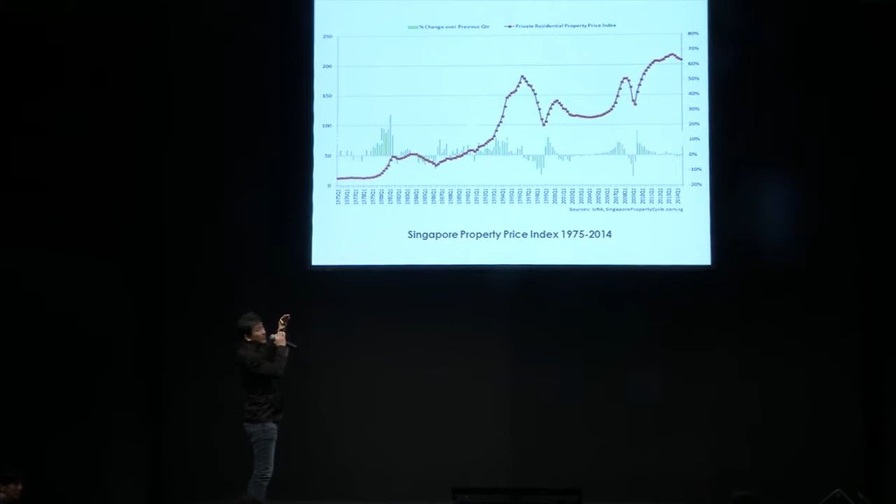In the last 20 years, property prices, due to scarcity and the growing population, have gone up fourfold. But ironically, the labor cost remains pretty much constant. So you've got low construction costs and very high land prices, which gave rise to this phenomenon called collective sale.

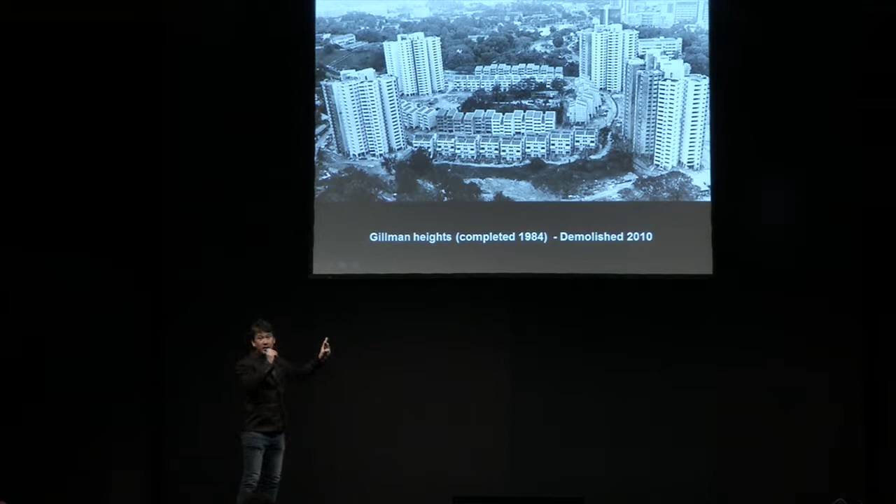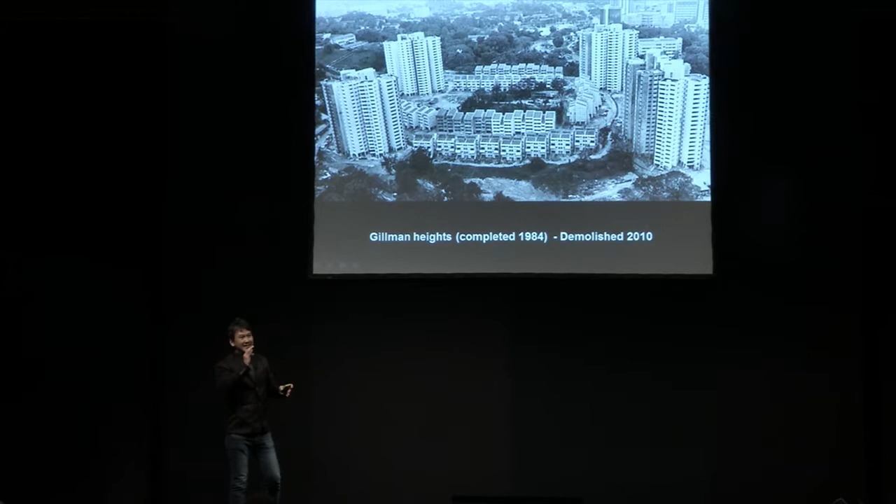This is a huge development in Gillman Heights that was completed in 1984. In less than 26 years, it was demolished, because the law allows the majority of owners to vote to sell the development wholesale. Because of land intensification, this was demolished to give rise to a new one.

So what do you have here? Literally a mindset in which we start from a clean slate because it is more optimal, and a culture of waste. One more thing about Singapore is that it's a tropical climate.

The average temperature is about 31 degrees, so there's a high reliance on air conditioning, so much so that we rely on it. What happens in air-conditioned environments is that you literally transfer the heat from inside the building to outside the building.

So when we started the practice, we thought there must be an alternative way of doing things. In 2006, this is the first preceding project.

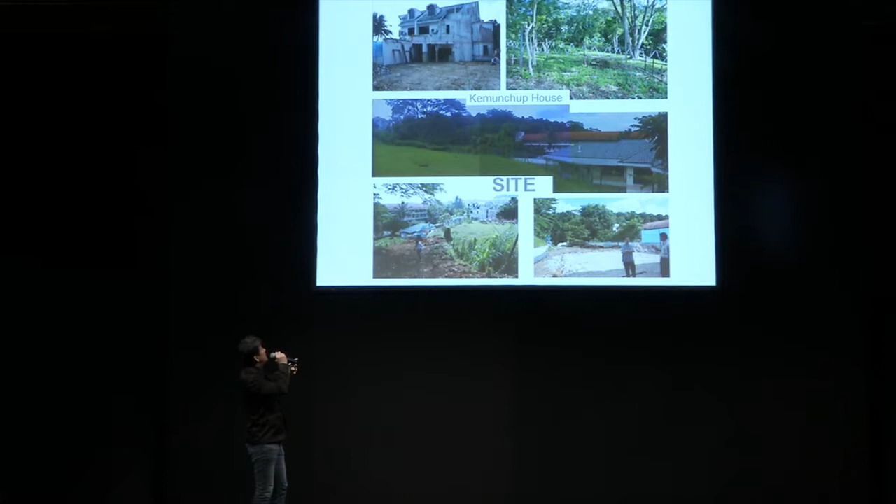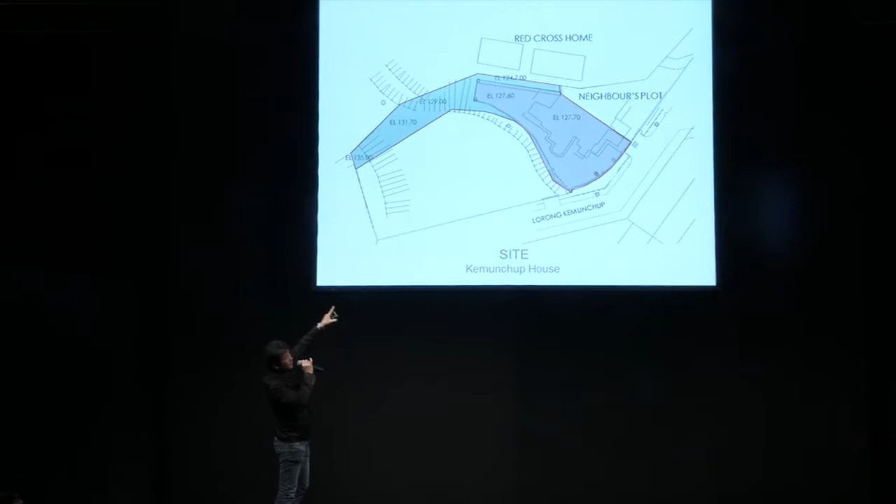The whole length of this is about 80 meters. The narrowest part of the site is about 5 meters — overwhelming constraints. The elevation from the highest to the lowest point is about 12 meters. And you have the existing house sitting down there.

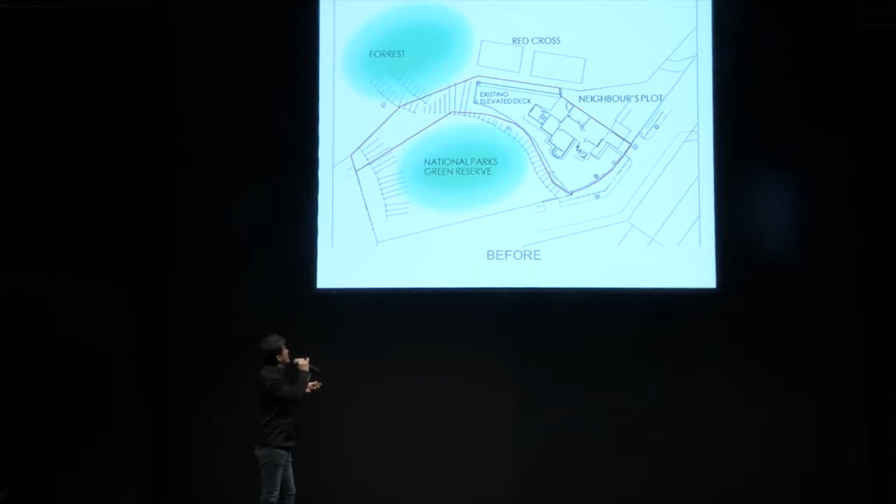What he wanted to do was tear it down and have more rooms to accommodate his parents. It's common practice in Singapore—you live with your parents, or invite them to stay with you—and he has 5 kids. Sandwiched in between, you have forests and a National Parks green reserve.

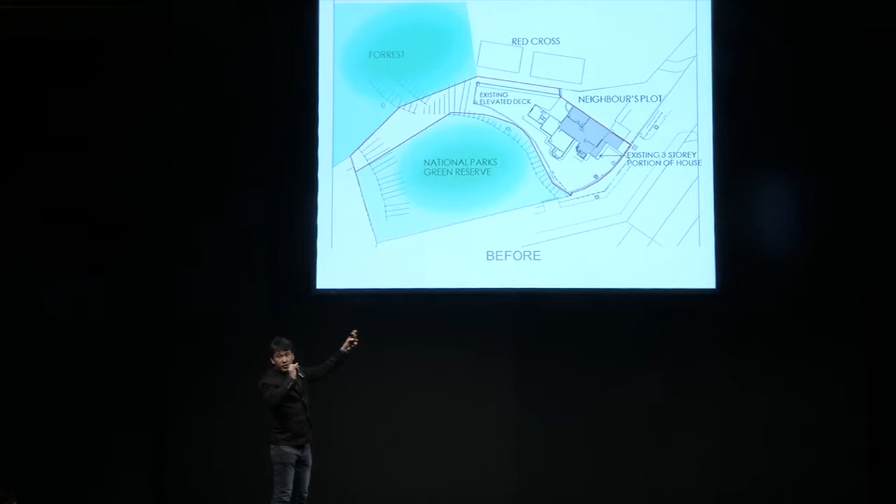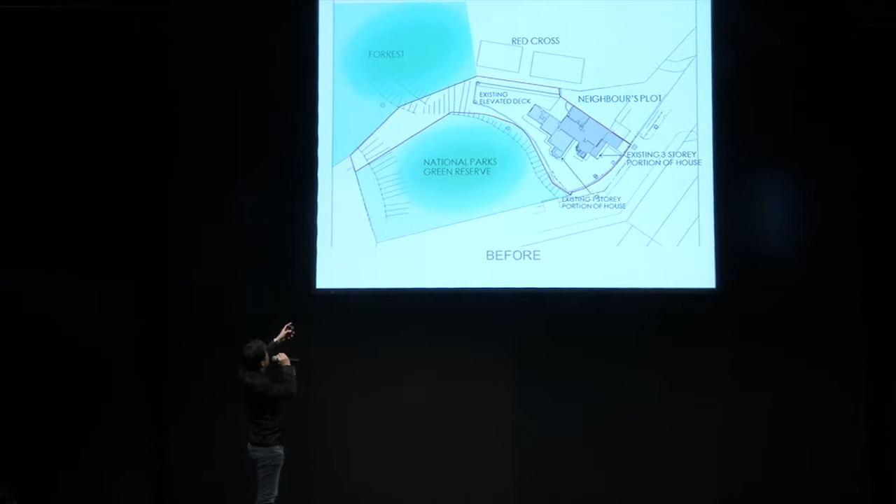That's the 3-story portion of the house and the 1-story portion of the house. When we analyzed the site, we thought, with that much land, the most valuable part is actually at the narrowest end. So why do you need to demolish?

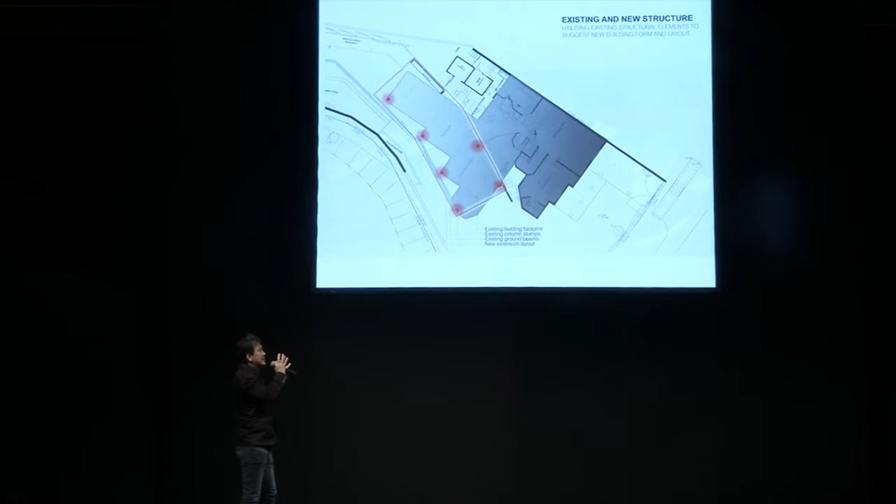In the existing house, you have the living facilities, kitchen and dining, and upstairs are all the bedrooms. The whole ground floor is a very opaque kind of construction, which didn't relate to the site at all. So what we did was plot out all the existing structure and foundation at the red points.

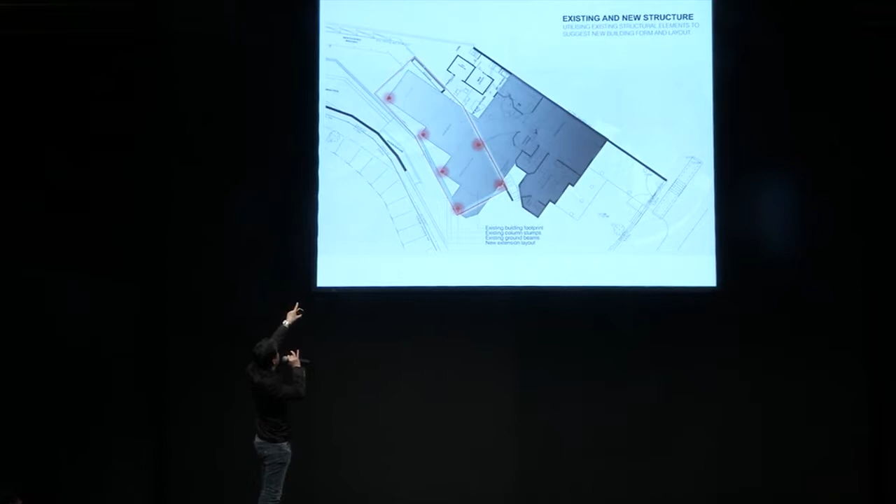We used that and reshaped the whole 1-story annex, relating it to the site, opening up views to the forest and the green.

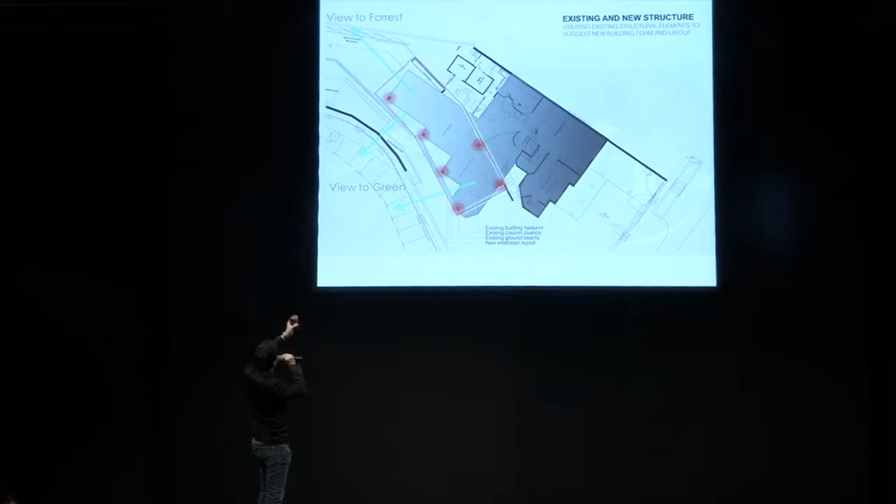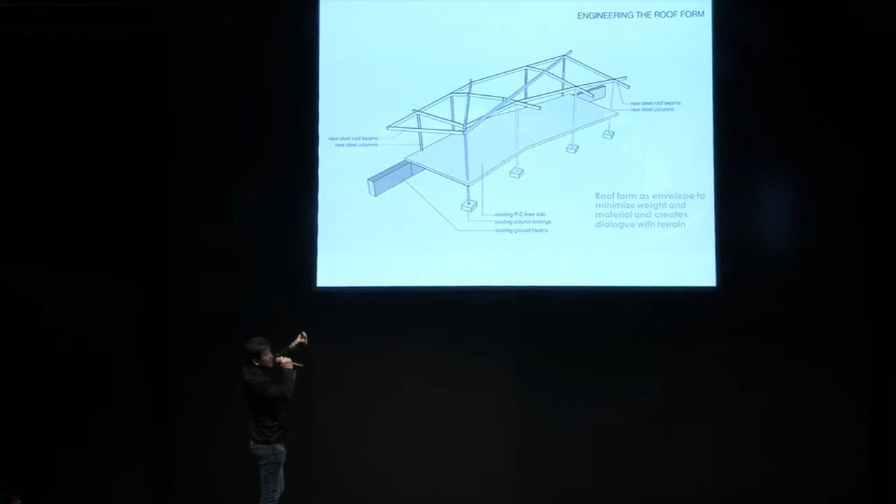We rested all the new structures—very, very light steel construction—on the existing foundation, so we didn't have to build new foundations. And because they don't align, you create a kind of very organic roof structure.

What you have is literally the existing house, and we created a living-dining pavilion, almost like the primitive shed concept—very light. We used roof shingles to cover the top, so it's light, with very low thermal capacitance.

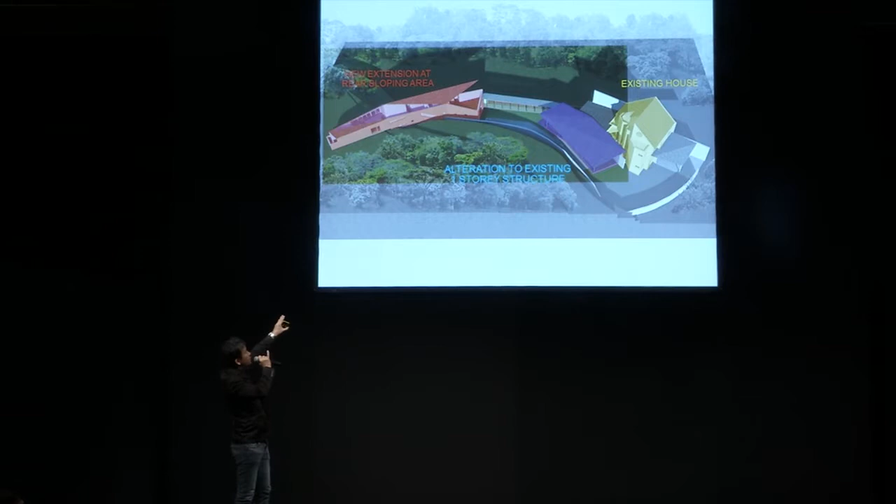We proposed a new house built at the back, at the narrowest point, where his 5 kids and themselves would live. The parents would live in the existing house, and they'd share all the facilities in between.

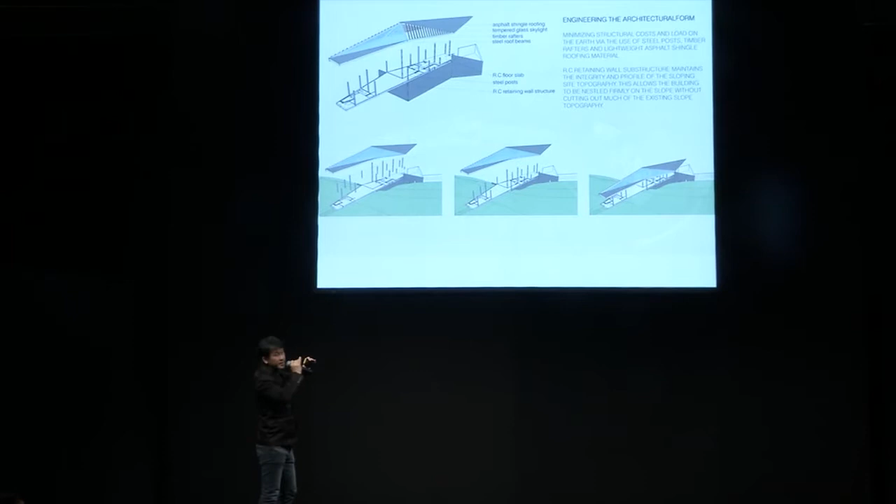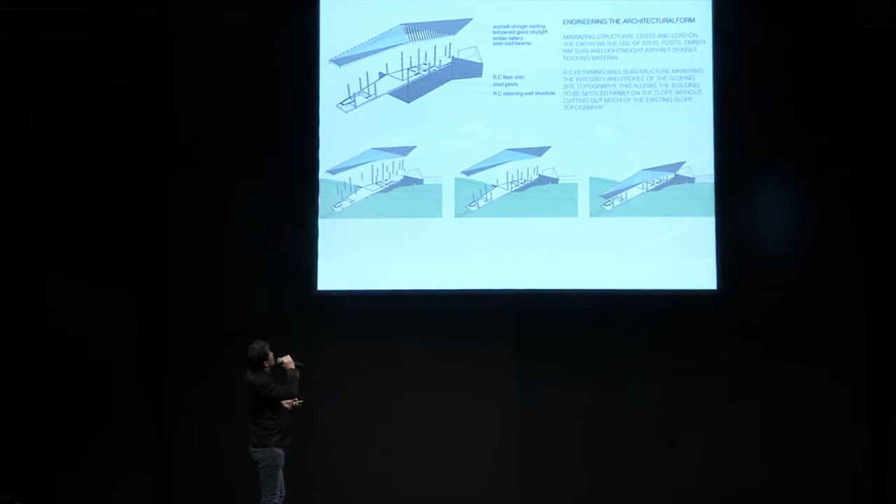At the back of the house, since it was elevated with a height difference of about 6 meters, we had to build a concrete raft and house an extremely light roof structure that hovers over it. It was a very, very lean engineering solution.

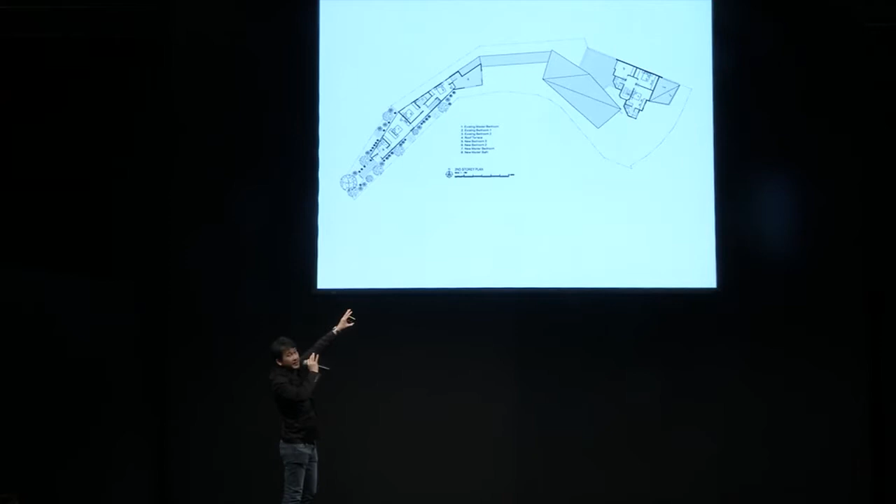We managed to expand the area of the house with 5 bedrooms at the back and another 3 bedrooms in front, giving 2 additional guest rooms. In the middle, you have the living pavilion.

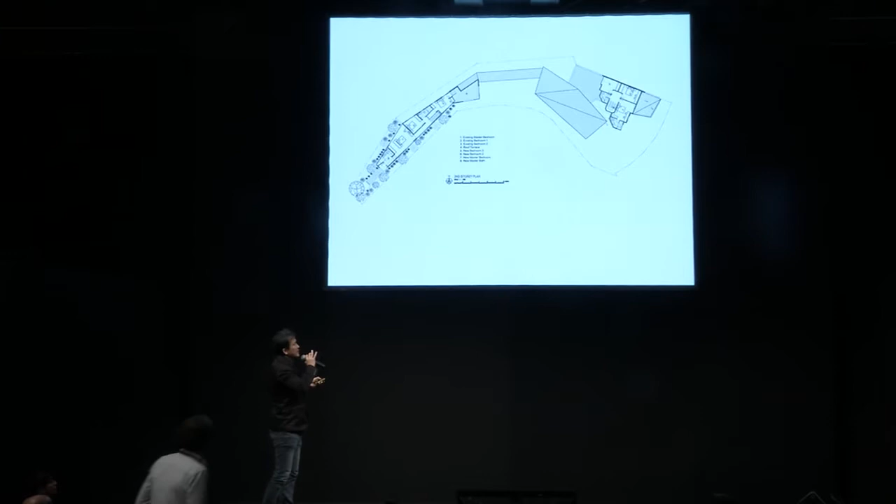So with a very, very low budget, we came out with a viable and, I think, quite poetic response, where the roof begins to undulate and nestle into the forest.

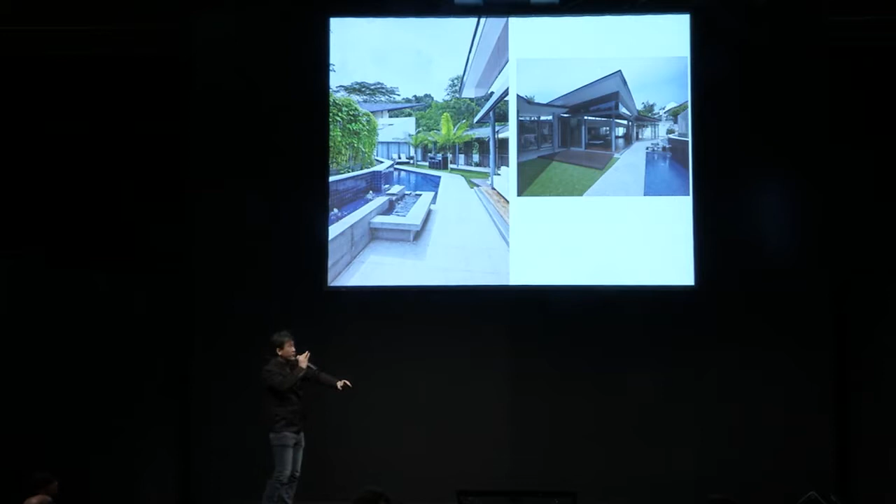And the lightness allows the air to actually flow through. We created a pool in the middle that was lining the perimeter of the existing structure and foundation. Pools in tropical climates are always very welcome because it acts as a heat sink, and through evaporative cooling it helps to bring down the temperature on the ground level.

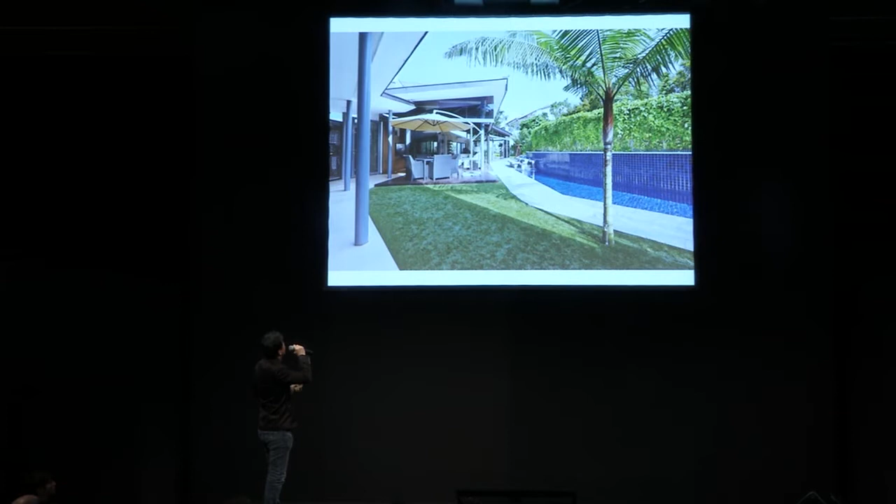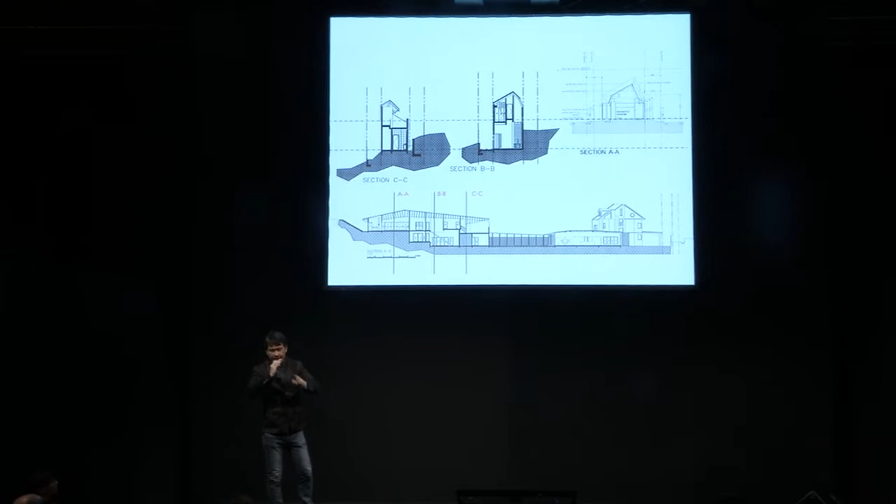And the lightness of the furniture begins to define the space. And how we made use of the pitch to minimize the material surface but optimize the space. So that's one of the bedrooms situated at the back.

Now the second house, which is the moonbeam house. This was the existing. The client came to us and said they want to tear down and rebuild again. But upon careful analysis, they actually had a substantial amount of land at the back.

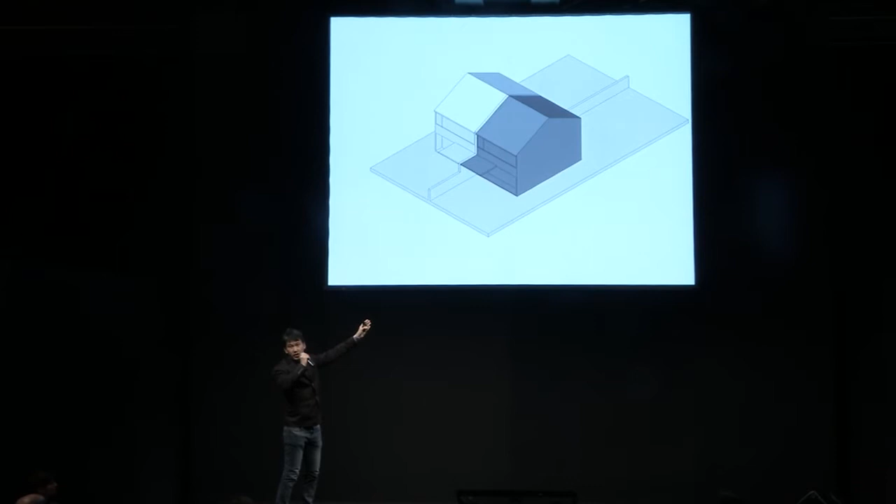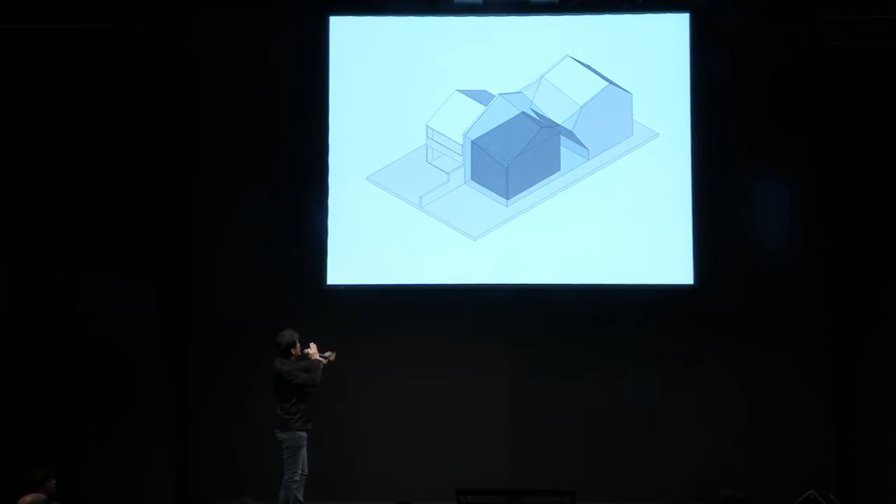So what we did was to create an outer skin so that the wife of the client, who was a fabric supplier, could have a studio, a large studio for her to work. This outer kind of structural skin, I call it, creates an armature that supports the additional attic roof. And the extension happens at the back.

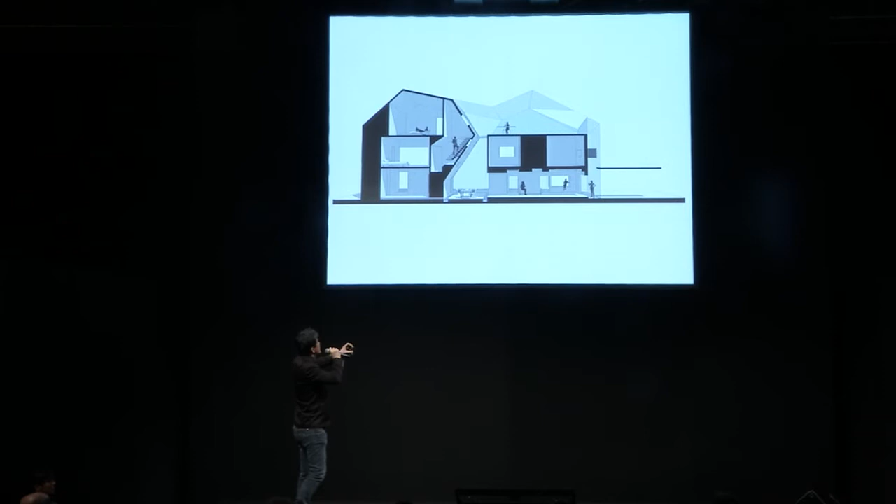So we preserved the existing house, created additional spaces, and the whole skin is actually a kind of metal mesh that's very, very conductive in a sense. It's highly porous, so the air actually flows right through the house.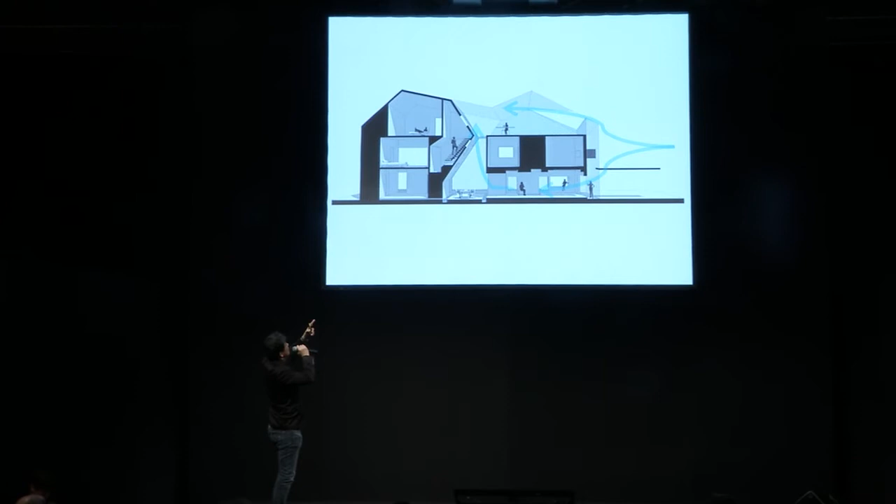That's the whole idea. We created a kind of central water court with a platform, so in the same way it helps to cool the house. And the studio happens in the attic. So that's what it looks like.

So the whole idea of creating that interstitial space is where the air flows through to help filter the heat and light, as well as cool the interior of the house. And that's the atrium - the space in between the new and the old, where you have surrounding water with this platform, allowing the air to flow up.

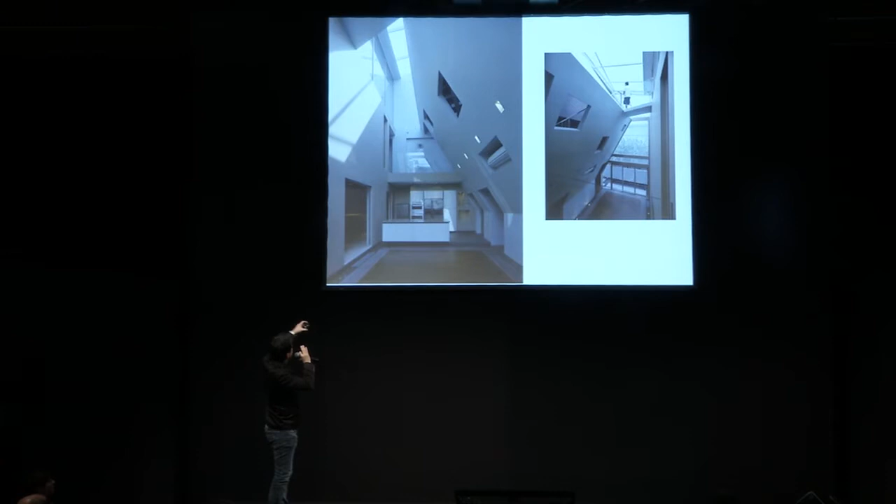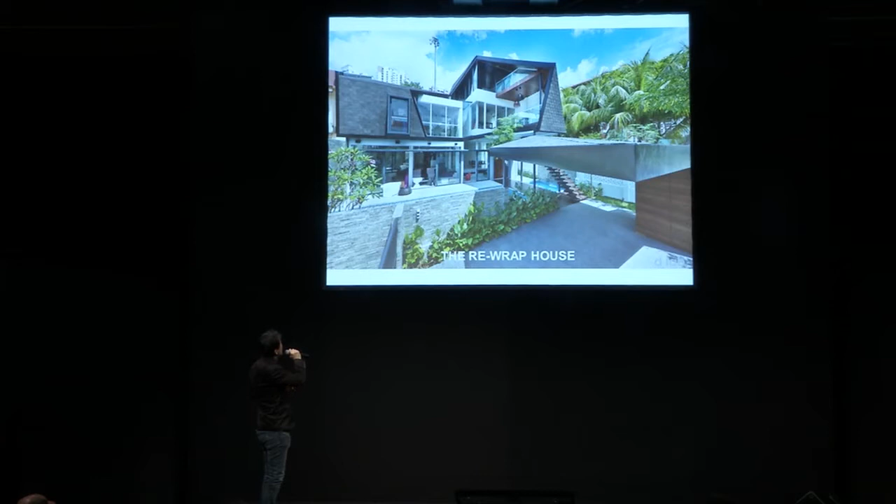So with these two ideas, this came about - the Re-Wrap House, in a similar situation. This is located at a cul-de-sac, and it's situated in a very dense, very urban environment where you have these tall housing developments in the background.

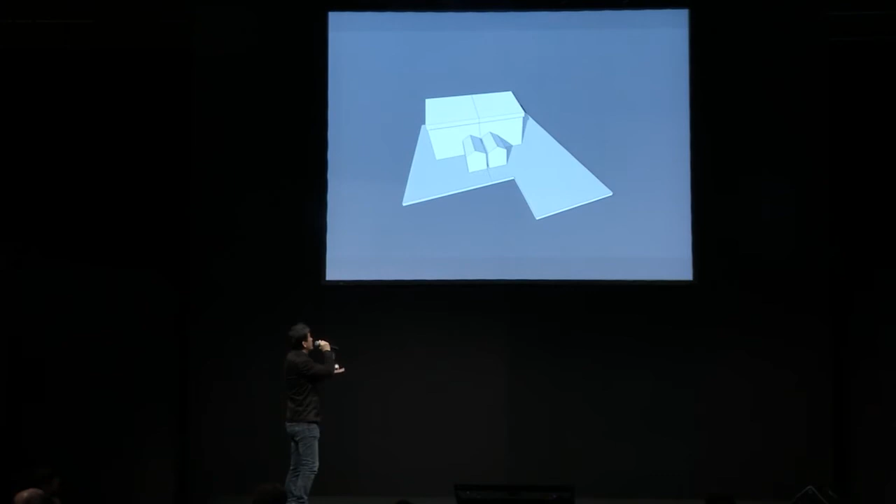And what we thought - in the same way that instead of tearing down and rebuilding, or building on top where it loads on the existing foundation - we wanted to create a very light structure beside it.

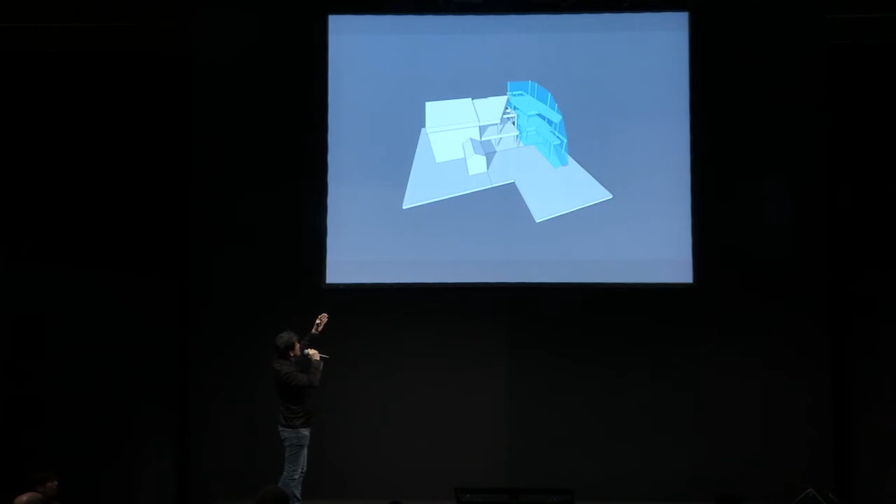And the program was to house an expanding family. She had one kid and was expecting two more, and the parents wanted to live with them. So they needed more space. Again, we started with a very light structure, steel construction with concrete slabs.

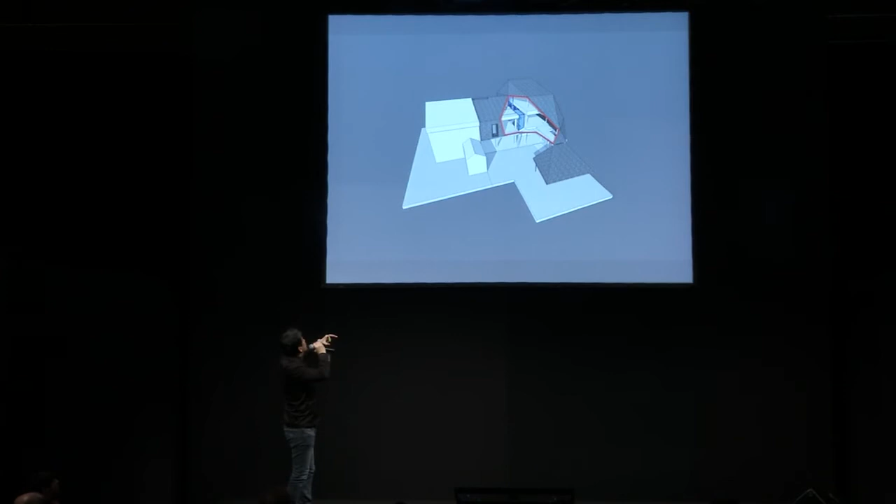And the idea was to wrap it with this very light material and create these interstitial spaces on the ground and at the attic, so that the air can flow through. We put the pool in the center, so it cools the whole ground floor, and that's the result.

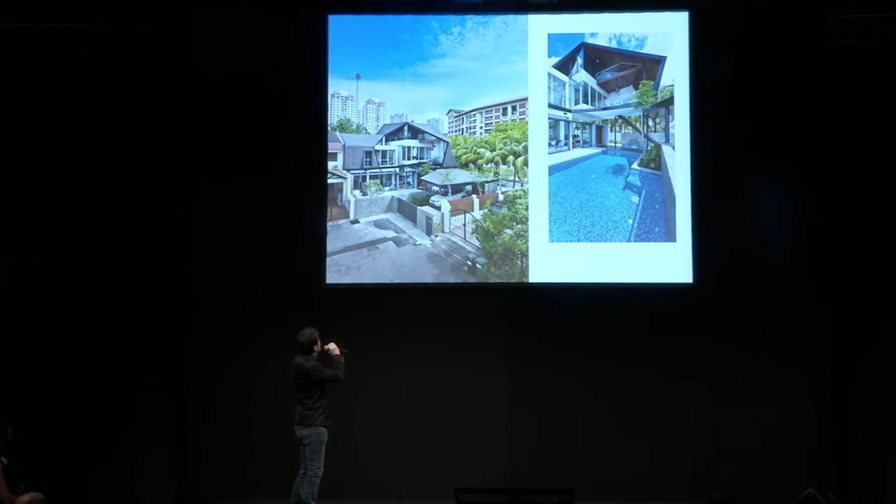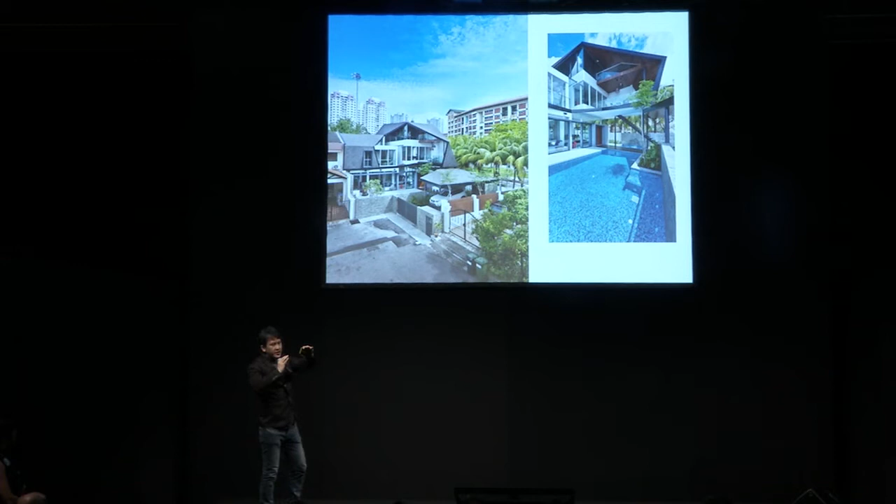So we had these accommodations contained within a very light roof that actually folds from the existing house, where we re-cladded the roof and it continues around it.

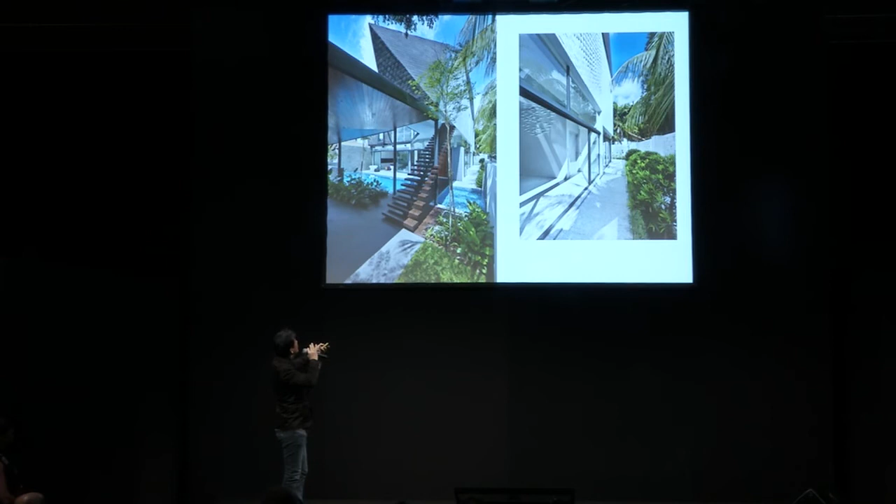But what happens at the facade facing the very noisy road? We had to create a kind of sound screen that was porous, as well as functioning as a sound diffuser. So we used brick, a very low-tech technology, to create these organic modulations so that we diffuse the sound in a very uneven way.

And that's what the interior looks like on the attic, which is where the family room is and the bedrooms. So it allows wind to channel through, light to come through, as well as diffusing sound.

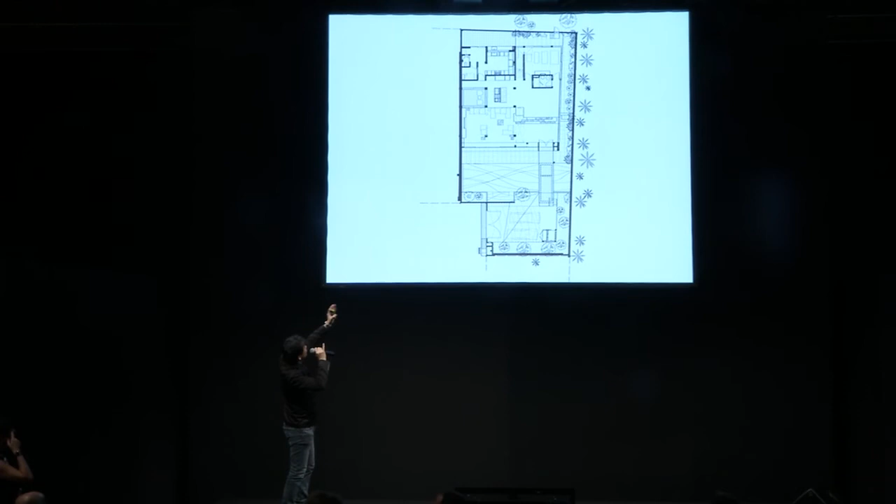So that's the ground floor plan. You have the existing on the left and the new on the right, and we created a pool in the court. The existing staircase was shifted to the back by creating a kind of courtyard in the middle.

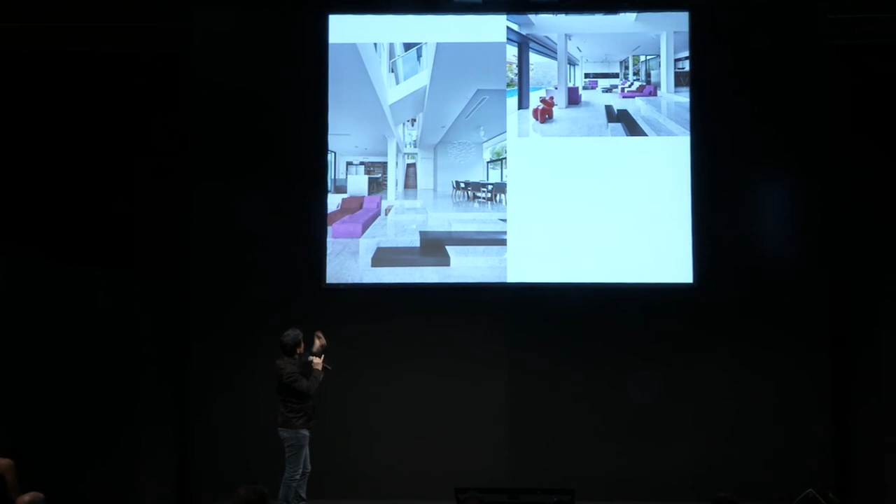So that's the space, the gap between the old and the new, where the wind passage is channeled through. And we have these steps which are existing, and we created some shoe storage. So that's a courtyard where the stairs used to be, and we created a kind of parterre where you could have some of the air channel through this court.

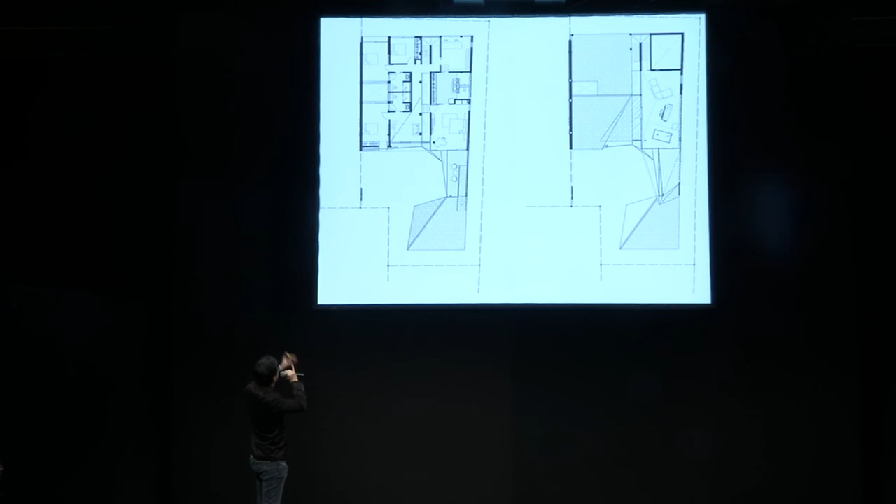On the second story, you have all the bedrooms for the kids and the master. The parents live on the ground floor. And that's the attic, the bedroom and the study.

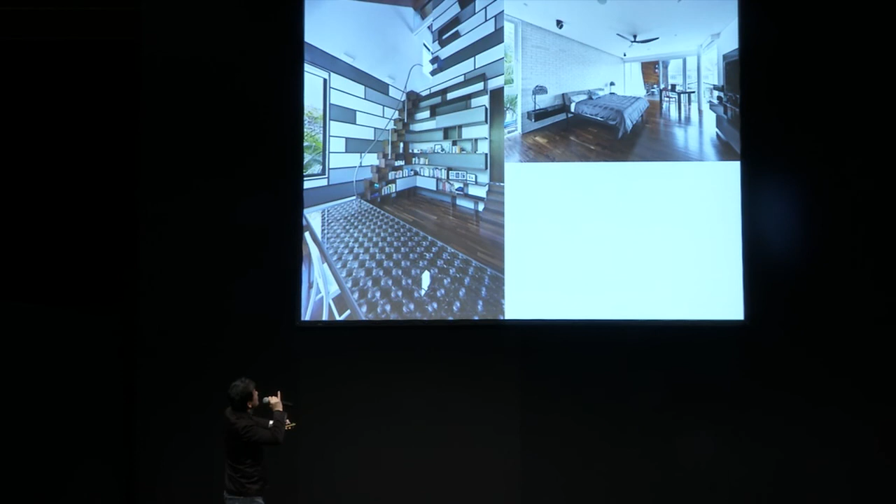So, in a nutshell, I think here we wanted to see whether there was a necessity, in a place like Singapore, to actually intervene in this very clean slate, tabula rasa manner. And these three projects, I think, were a study to that.